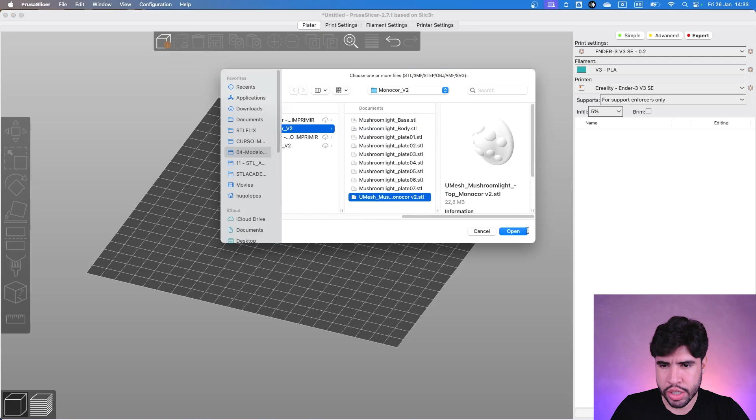First of all, we are going to talk about bridge settings, because this part here needs a lot of bridging. If you are printing on a common printer, like a Marlin printer, a slower one, you can use a similar setting as mine. If you are using a Bambu printer, like a K1, a faster printer, a Klipper one, you may use faster speed settings for all parts on your print, but for the bridge settings, you should keep it similar to mine.

Let's see an example here. If you have a similar printer to mine, you can keep all the speeds similar as well. We can increase this to 100 millimeters per second for this particular drop. If you don't know where this model came from, it's from STLFLIX, from the Valentine's Day drop, Valentine Lights, and you can check the link in the description.

But what about this drop? We have a lot of lamps in here. So the main topic of the model is not the finishing, not the outside of the model. Actually, the main part of this print is the scene that is inside of the model - the couple in a picnic. So we don't need to pay a lot of attention to decreasing layer height, because the important part here is the scene. First of all, let's just guarantee that it's going to be fine, but without overly complicated settings.

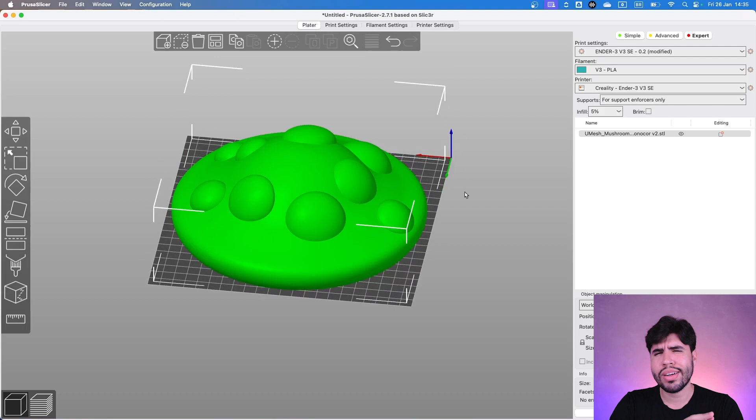So let's see here, I'm going to increase the speed - that's what my earlier point was about. We are increasing speed; we don't need to reduce it a lot, we don't need to worry a lot about vibrations. So let's keep the speed as is here. But we have to be concerned about bridge settings - let's keep it at 60 because we have a lot of bridges in here.

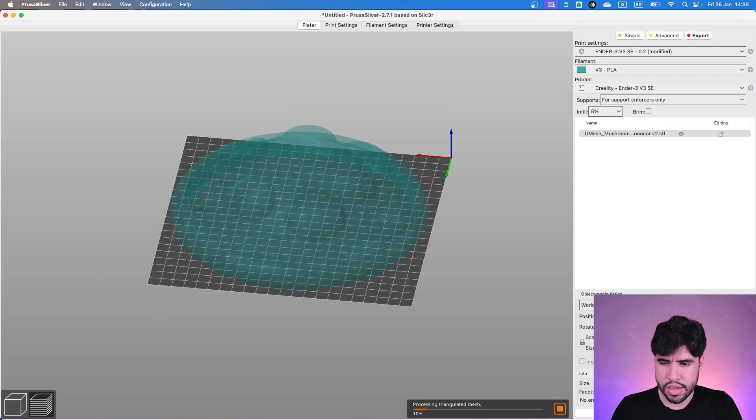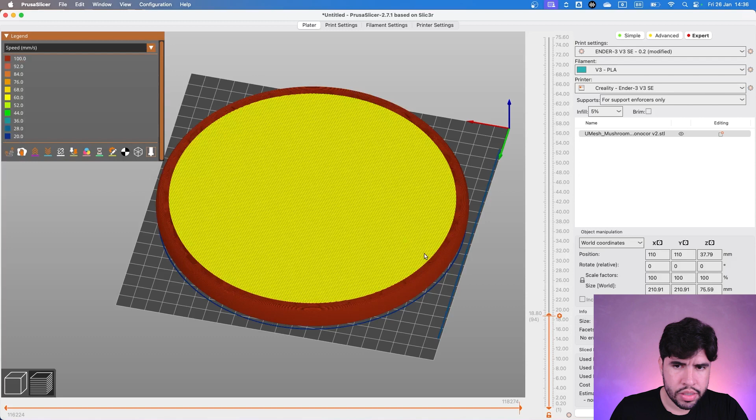Let's first slice this. If you look at this part, we start with this arc, this circle, and then we have the closing of the model. In here, we have a lot of bridges. But if you use a proper speed here - look, all the model is at 100, but here we have 60 - we're going to be fine, because we have more time to cool those lines. The nozzle does this part, then we reduce the speed and have more time to cool this down. This is going to result in a better finished bridge.

So remember that, remember to decrease your bridge speed on your slicer - Bambu slicer, Prusa, it depends on your printer. The bridge settings need to be similar to this, you can go 40 to 60. Keep this on your bridge speed settings. But the other speeds depend on your printer - if you have an Ender 3 V3 SE, you can keep it similar to mine. If you have a Bambu, you can go crazy, like 300 or something. But it depends on your printer.

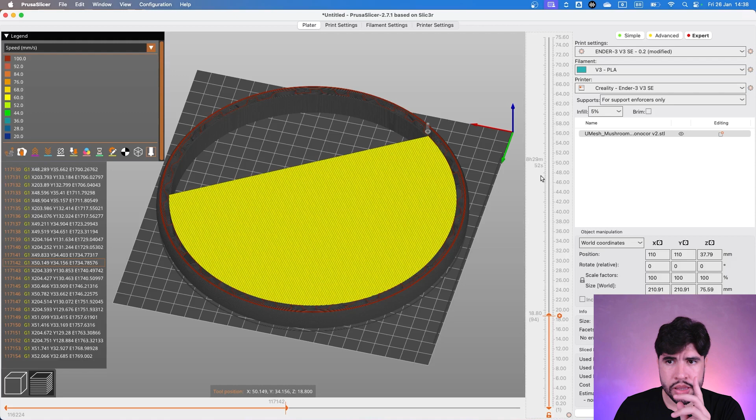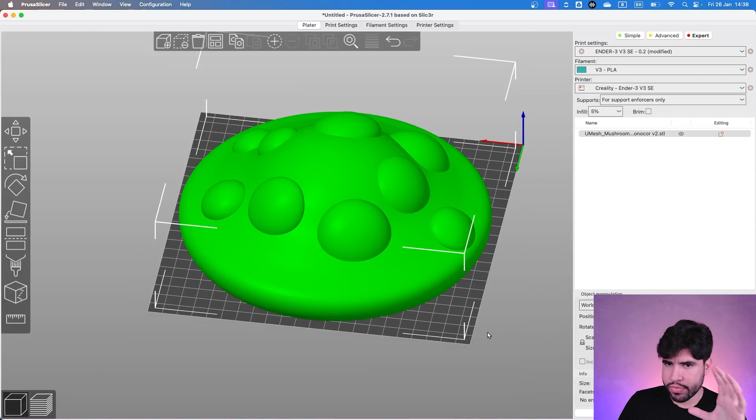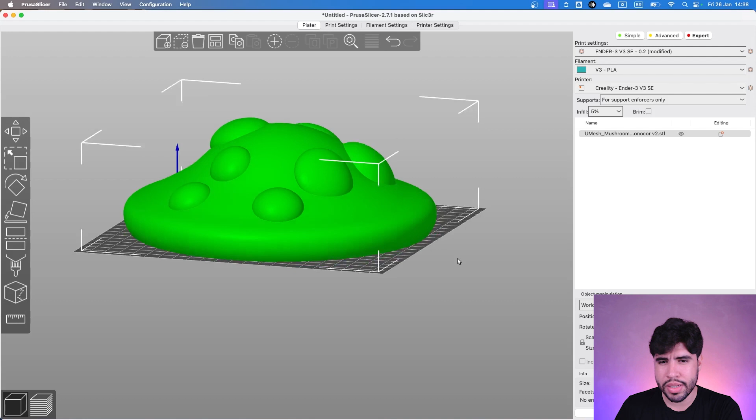Now let me see if there's another detail about this part. I don't think so. This is a big print, so in my opinion we don't need to reduce the layer height a lot. This print is going to take 10 hours, and I think we can save some time by increasing the layer height. Let's put 0.32 - and why am I going so big? Because this is a smooth model, we don't have a lot of small details, so we don't need to keep it at 0.2 or lower. Even if you put 0.32, it's going to be the same shape - we save time while keeping the same shape and appearance on our model.

It's going to be more visual, the layer lines maybe, but it's not going to make so much difference, okay? And you are going to save a lot of time. In my opinion, it's worth it. So let's increase the layer height.

As I said, if you are seeing these slicing videos as a series, in the advanced settings we can change also the extrusion width. Every time you increase your layer height, remember to increase your extrusion width as well, to keep the same adhesion between the layers.

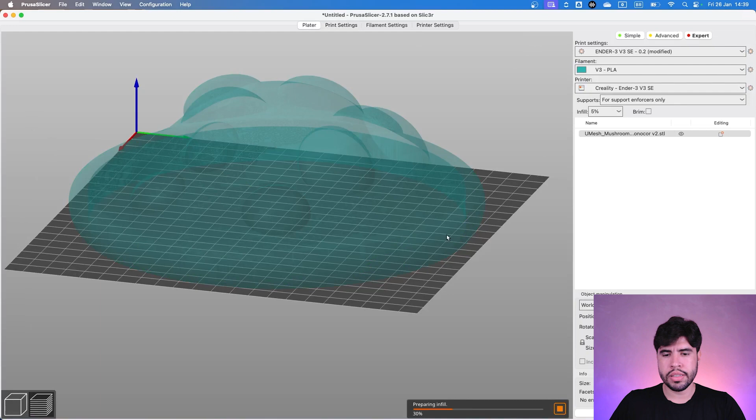Well, we save 2 hours of work. So, in my opinion, worth it. If you disagree, you can keep 0.2. It's a choice. This detail of the layer height is not going to determine the success of this model, okay? You can keep 0.2, it's going to be okay. You can put 0.32, save 2 hours, and that's also going to be okay. It's a choice for you. The only strict recommendation is about the speed, okay?

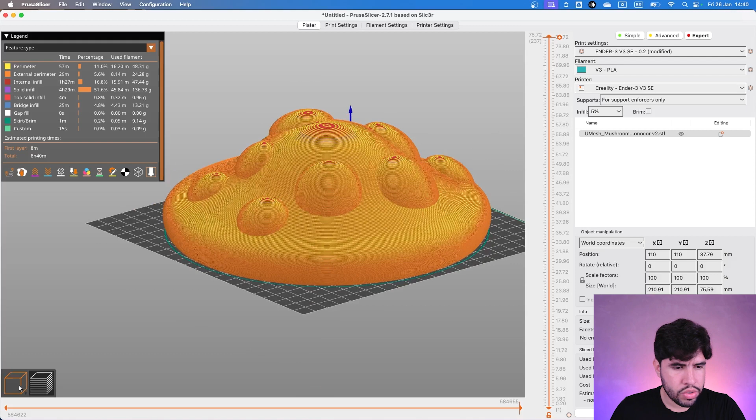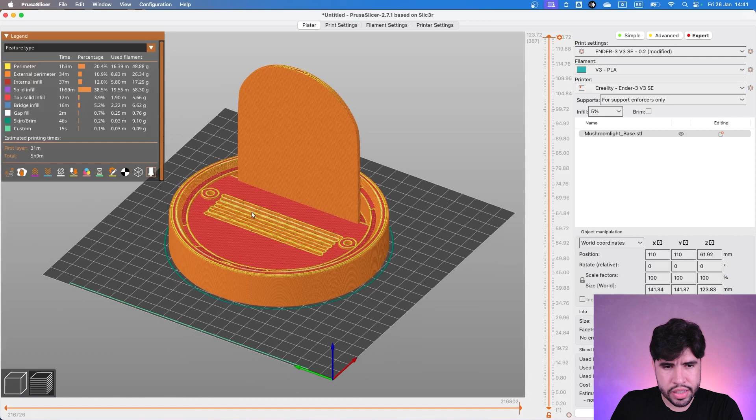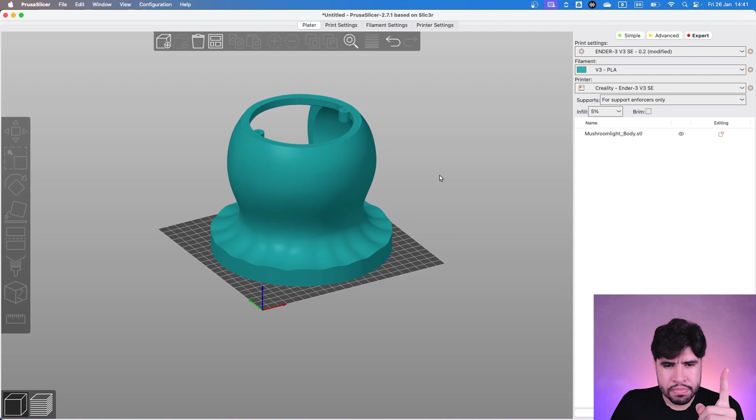And now we have the body part. And here I think we do have a little problem. Let me show you something. I think we may need supports on this part to hold this.

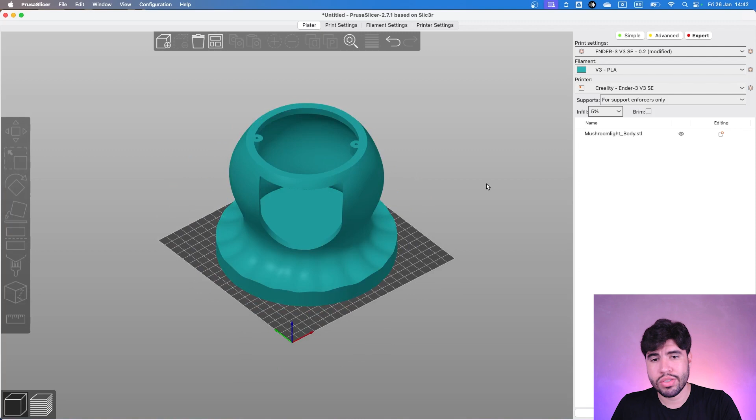Maybe activate the organic supports, avoiding the supports being on the piece, that's something we don't want. Maybe rotating this part to a corner, we have more space for the organic support to be built up. Let me see if that's going to work — I'm not sure, I just thought about it right now.

Let's put organic supports. We are with 0.32 millimeters, and we are going to activate 0.2 Z distance. We are not going to put more distance because if the supports are too far from the piece, they are not going to do their work. We want the supports holding the piece, so we need to put it close enough — 0.2 is a good distance. And also 3 interface layers and 0 pattern distance.

Another detail: maybe your slicer profile, in the printer settings, depending on your printer profile, has the extruder layer height limits set with some values. Put both at 0, and then the slicer can change the layer lines on the supports. So now let's slice it and see how it works.

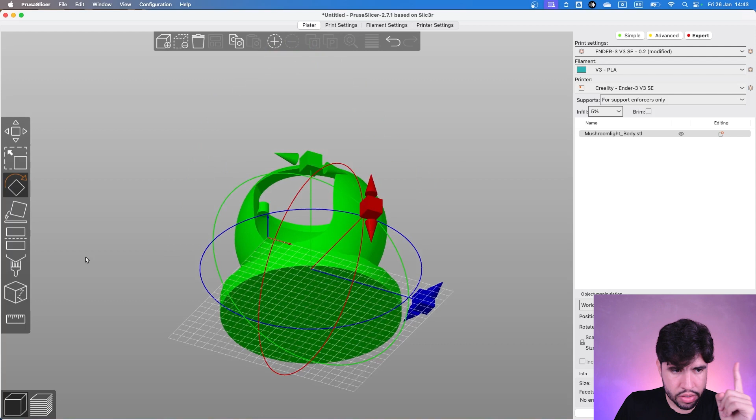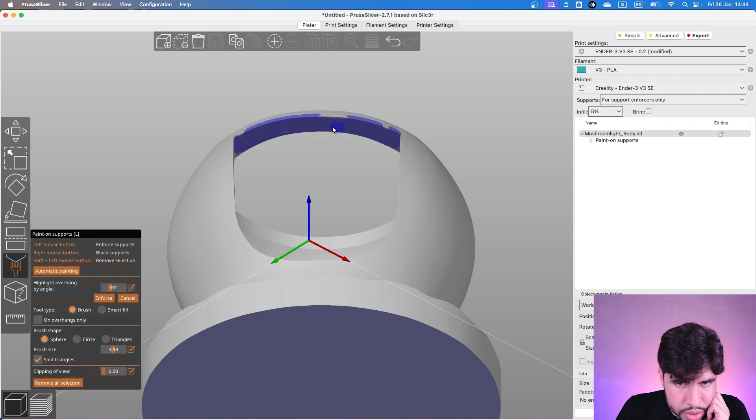But first, let's paint supports here with this paint support tool, 30 degrees, just for checking. This part over here, maybe we need to — let's put it here, this one. I should increase the brush. Of course I would paint outside, always. Now let's put the circle one, press shift on our keyboard, and just clean this.

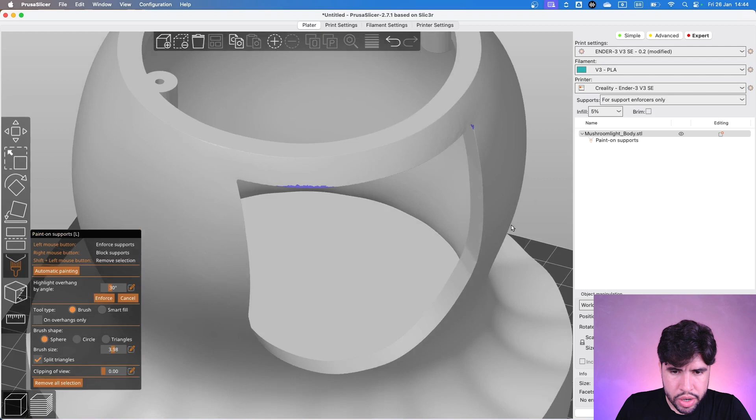I didn't want this because I don't want supports on the printed parts, but here I think we don't have a choice. Let me see.

And slice it. Well, guys, it worked. I didn't want supports on the print, but they are outside of the build plate. We don't have space here.

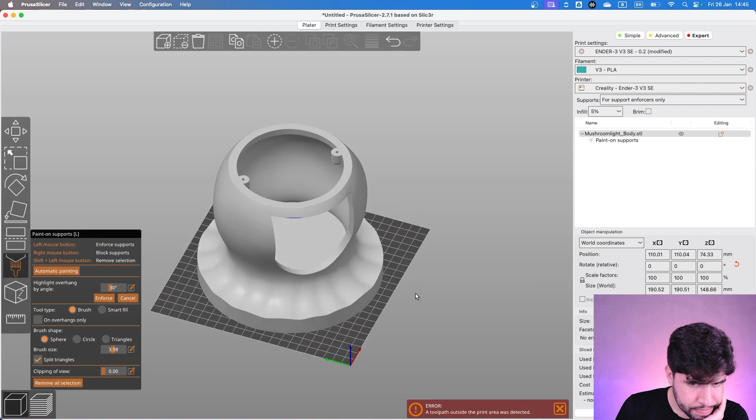Let me see if we can put something here to change that. Let me see if we can put it as a one tower.

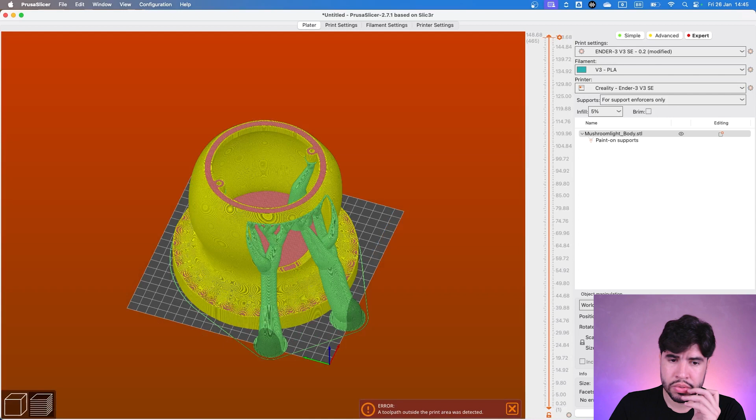Oh, almost there. Now we have two. Let me see, 10 degrees. Oh, we are not going to make it. Okay, it's not going to work. So the diameter of the branch, maybe we could do just one single branch, but it's not going to work.

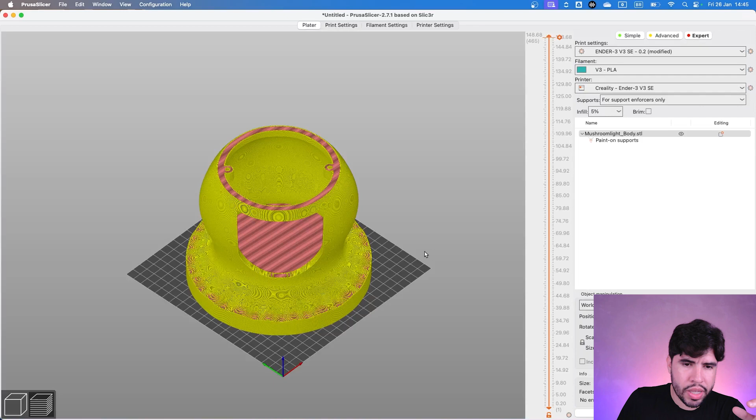So let's change it. If you have a bigger build plate, you could do just this one with the settings that I just showed you. Okay, if you have space, maybe we do have. Let me try something. Maybe we could do like this. Maybe, let's see.

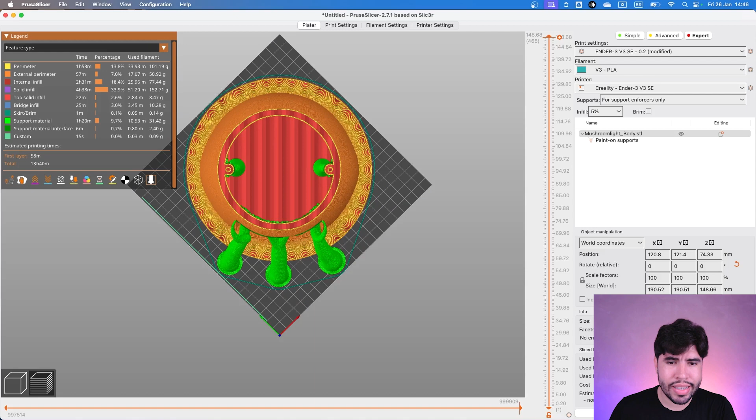We are on the limit, but we could do it. I can't believe it, just a single adjustment. So we can use this, okay? But let me show you if we didn't have space, okay?

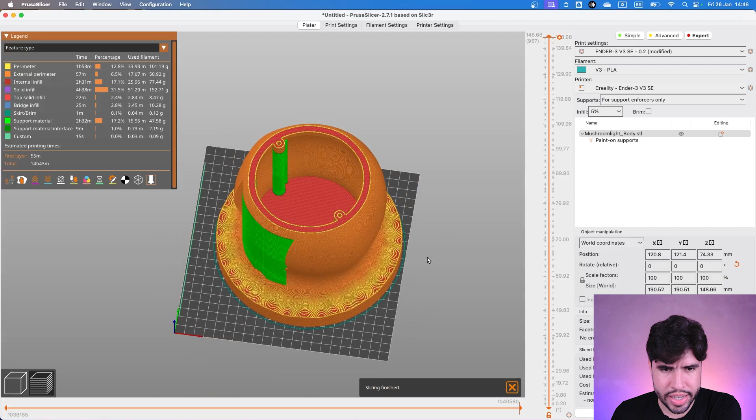If we didn't have, we just change for the snug options. These options follow exactly the support area, okay? So let's show you guys, okay? These are the snug settings, and maybe they are better, maybe, but they are harder to remove.

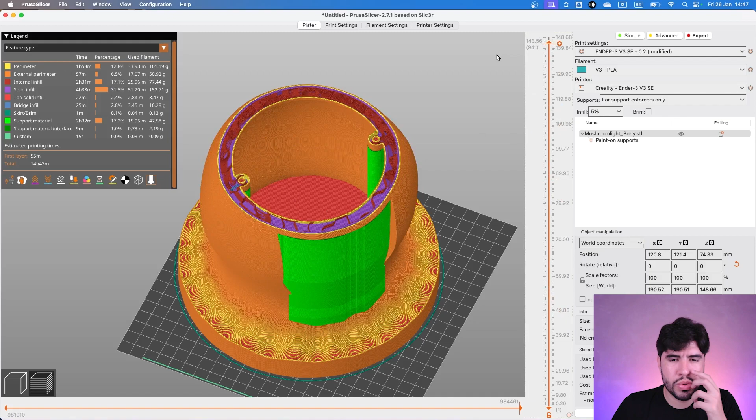Look in here, in this part it's going to be easy, actually easier. In here, and also here, it's just a single tower, and then you can remove it. But in here, we need to break the supports. In here and also here.

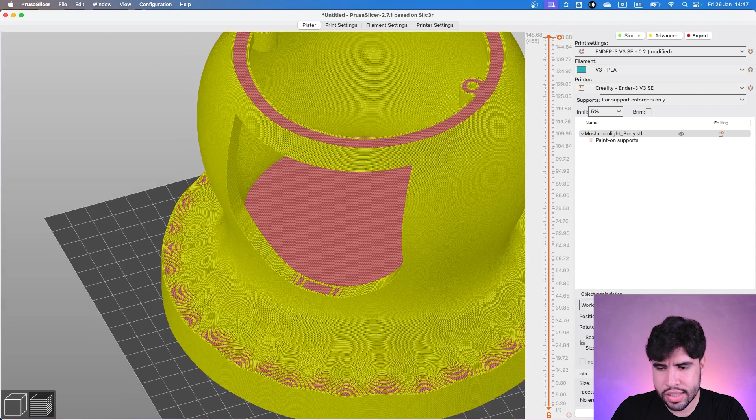We have two options, okay? The tree supports and also the snug options. Remember that, and remember to keep the bottom Z distance 0.32. This is important because then we have more distance in the bottom part when the pieces used to glue each other, the support and the print, and we don't want this. Okay, 0.32 on the base is going to be fine. It's going to be easier to remove.

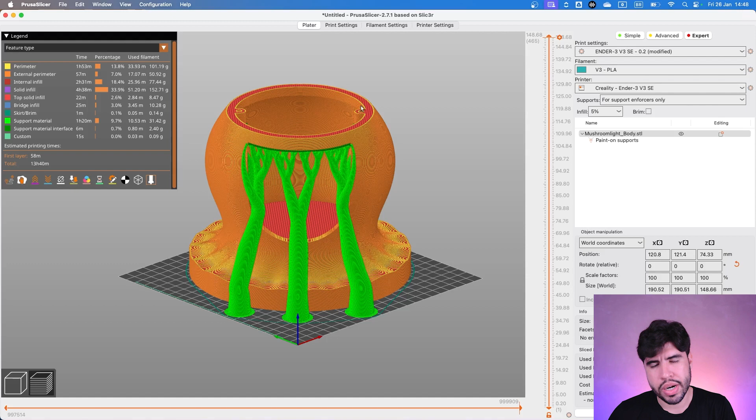Okay, you have this option, or you have the organic option, this one. All right guys, I think you should be fine to print this. And also I am keeping the 0.32 layer height because this part is not so important, and also we don't have details, we don't have small details on the surface.

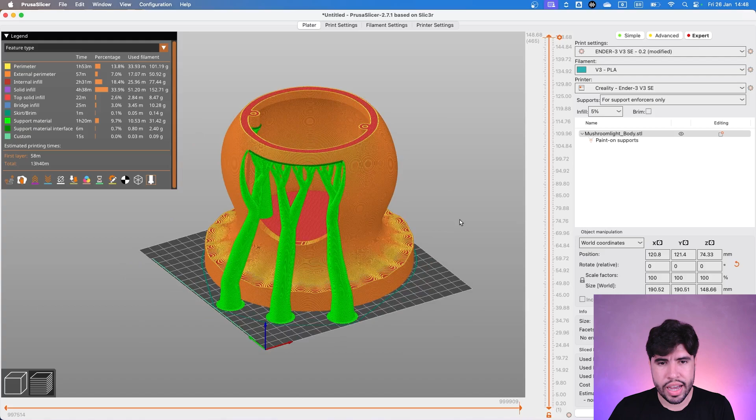It's just a smooth area. Okay, so 0.32 is going to make the same shape as the model. We don't need to reduce a lot, and we are going to save some time in here with this big print, it's a big model. Okay guys, and I think we are good, and it's going to be easy to remove. You can choose between snug or this one, whichever you prefer.

The downside of this one is this. I don't know if it's safe enough to print like this, but we should try. Okay, I think it may work.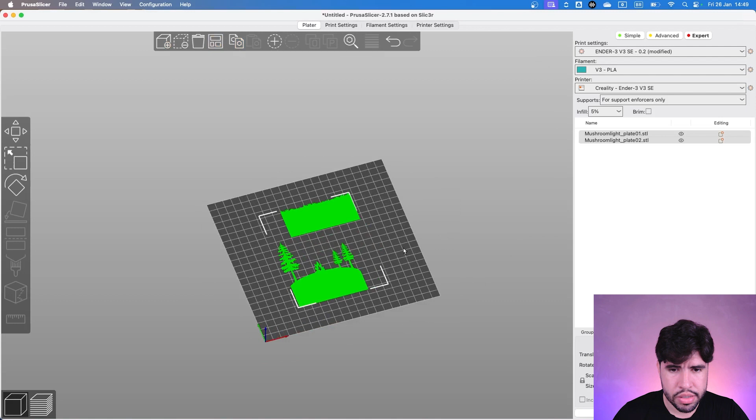And finally the last part, the layer lines, the layer arts actually. So you can put the images in here, and then remember to put your standard profile. You should be fine, 0.32... 0.2, sorry. And then the perimeter generator, change for Arachne. I will show you the difference.

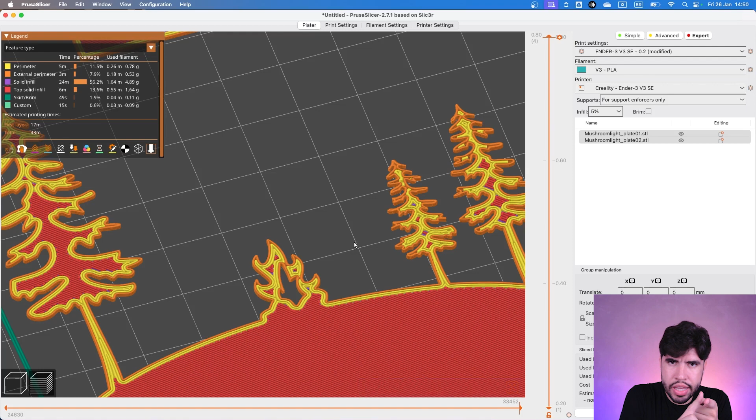Okay, all right guys, this was just a class, just one single tutorial, but you know, on 3D print we have a lot of changes depending on the model. We have resistance prints, we have decorative models, we do have models that we want to print fast, and a lot of other situations.